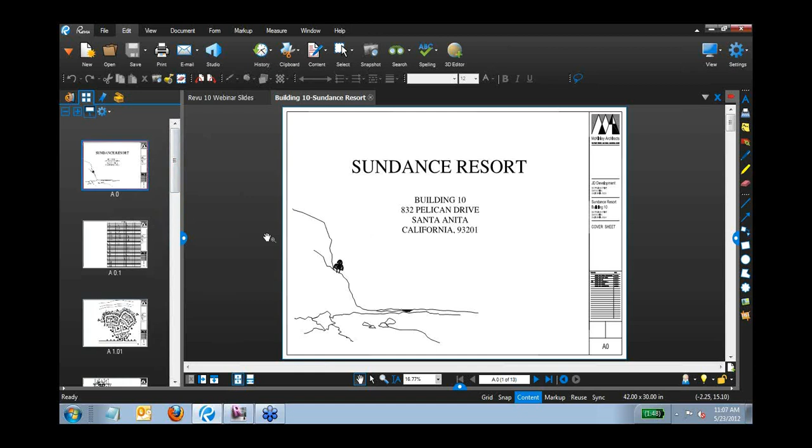In an effort to navigate more efficiently through the interface, I can also leverage the power of hyperlinks in a PDF. If I jump over to my PDF file here, the drawing file, and show you the thumbnails on the left, you'll see this is a multi-page PDF, and I've put a little pre-thought into this setup by creating a smart drawing set.

If I go to my index page for this project and zoom in closer to my sheets, you'll notice that as I hover over some of these sheets, I get my hyperlink cursor. Here's the pan cursor, and here's the hyperlink. If I want to go straight to this page, I just click on it and it jumps straight to that page, making an easy-to-navigate drawing set.

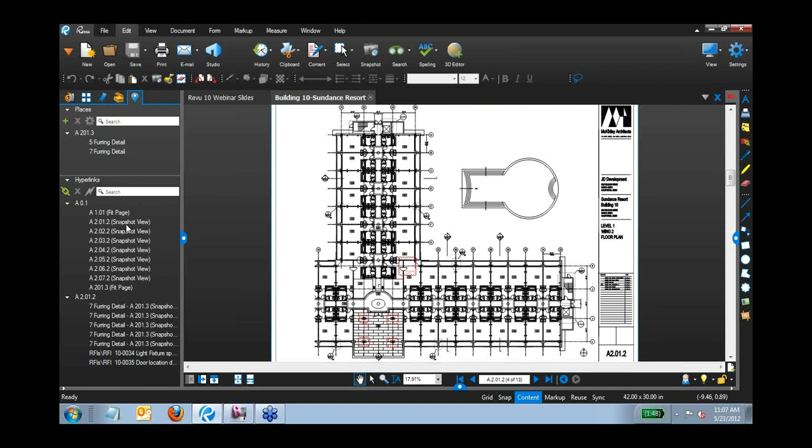If I open up my links panel by going to tab access, links, you'll notice that all my hyperlinks are composed by page, so I can jump to certain hyperlinks easily. You'll also notice that I've hyperlinked my callouts to go to detail references. For this column detail, this callout, if I select it, it jumps me straight to that reference in my details page within this same set.

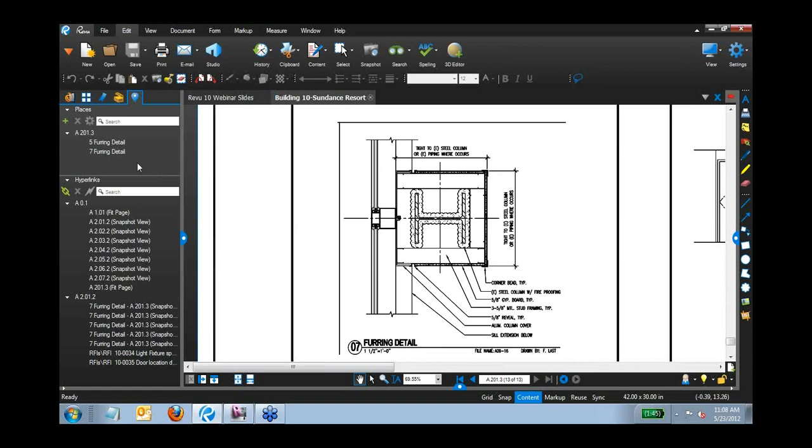Something new with Revu is the ability to reference places. If I go back to page 4, my floor plan, I've shown that this detail link is already hyperlinked to easily navigate the set. But if I've got another detail I want to link, like this one for the elevators which isn't currently hyperlinked, I want to create a new hyperlink for it.

New with version 10 is this feature called places. If I have a hyperlink destination that's going to be used over and over again, I can create a place. To create a new place, I just hit the plus bar, give it a name, and instead of jumping to a page, I want to go to a snapshot view of the elevator detail on my detail page, so I'll say get rectangle.

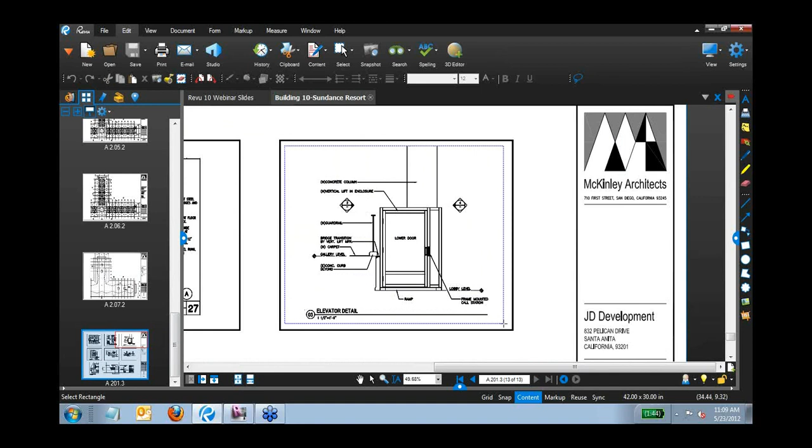I'm going to navigate to that detail page, jumping over to my thumbnails to get there quickly. On my details page, I want to reference this detail over and over with that callout, so this is going to be my place - the elevator detail. I'll select OK.

Back to page 4, the floor plan, I've got this place now saved as the elevator, and I can easily grab my hyperlink tool under markup and just draw a rectangle to create a hyperlink. But there might be more than one callout in this set.

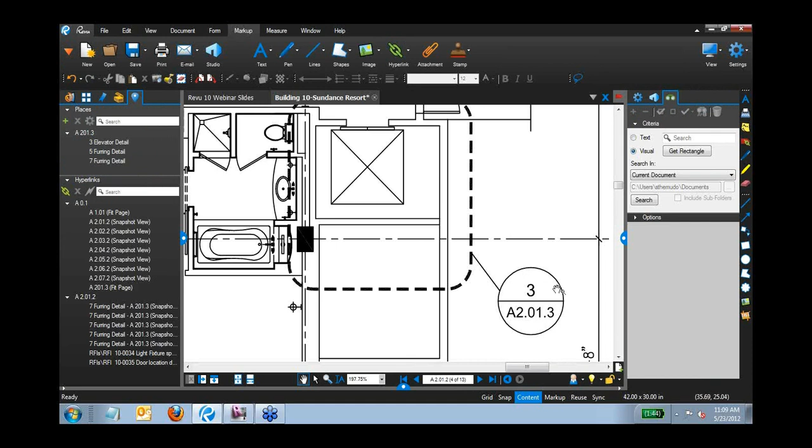So I'm actually going to use my visual search command, again through tab access, search, to find every single occurrence of this callout in this particular sheet. I'll select just this current page and get a rectangle of this detail marker, since I want to find all the instances of this detail on this page. I'll set my sensitivity a couple clicks lower to make sure I find all the instances on this current page, then select search. Now Revu is going to search for that callout anywhere it appears on this page.

Let's try that one more time just to make sure we got it right. I'll go back to my visual search, get the rectangle, draw a rectangle around the number of the callout here, zoom out a little, and try the search again. It looks like I wasn't able to find anything in this document.

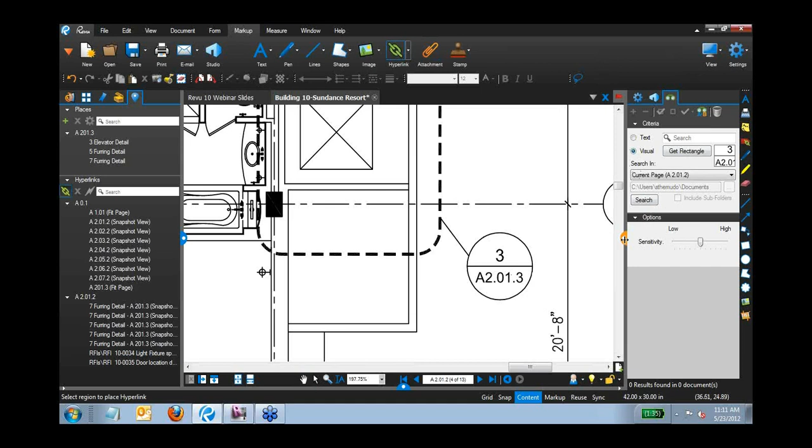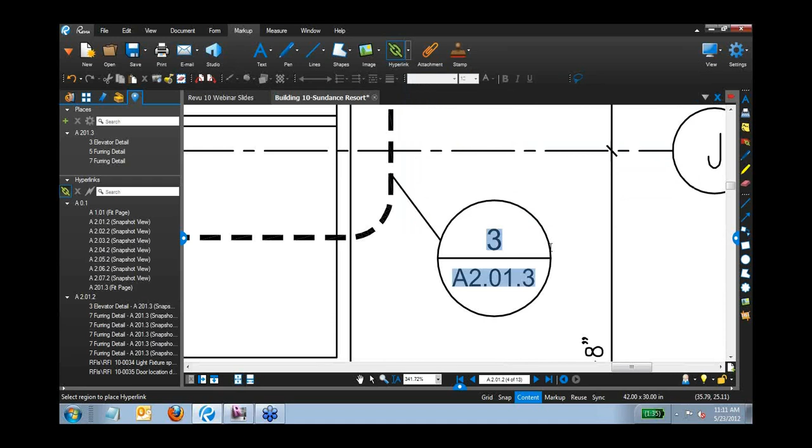So I'm just going to go the good old-fashioned way and hyperlink it manually. Within my hyperlink manager, we've got the ability to draw a rectangle around the area you want to hyperlink to. By selecting that place, I've already got it in my pull-down here to hyperlink to that elevator detail. Selecting OK and making sure I'm using relative paths, I've now generated a hyperlink. You'll see there's a new hyperlink on this page - as I hover over and click on this callout detail, it takes me directly to that detail on the details page.

Let's keep moving. I can hyperlink many of these details over and over as we go through the set, to make this an easily navigable set so that multiple people opening the PDF can easily find which details and which pages they need to reference without flipping through every single page.

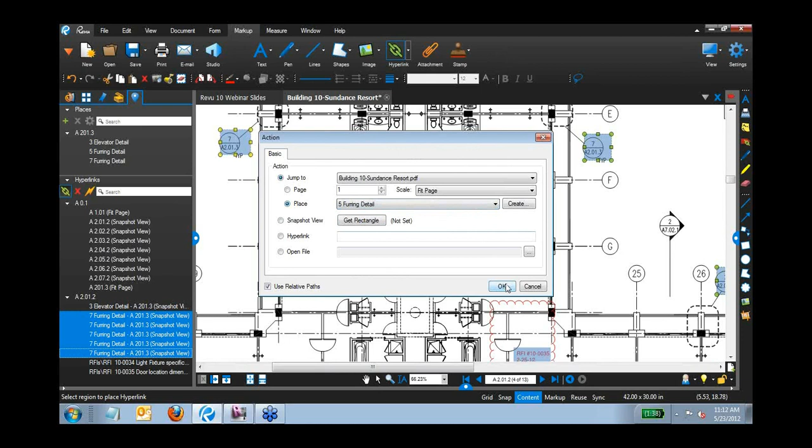Also, with the links in my Hyperlinks Manager, if I need to change out a detail or update it, I can multi-select these links and hit Edit Action. If I need to update these to a new detail reference, let's say the furring detail should refer back to detail number 5, I can quickly select all those, update the place detail, and select OK. Now, as you see in my Hyperlink Manager, all those have been updated to the furring detail on detail number 5 on the sheet.

So that's a quick and easy way to reference and update those sets using the Hyperlink Manager, which is new to Revu 10.

Another thing that's available with Revu 10 is the ability to create projects. Projects makes drawings and files available to team members, consultants, or anyone else who needs access to these files without actually connecting to your network. So what we've done is create this new project feature within the Studio tab.

You'll notice my project can host - I've got my Sundance Resort project right here, let's go ahead and open that. You'll see with the project I can host not only PDFs, but also folders of other file types - Word documents, Excel documents. Think of it as a simple DMS, a document management system, a way to share files online through the Bluebeam Revu interface, not just PDFs but also other file types.

You can add these files to sessions just by right-clicking on the file itself. You can check it out, or add it to sessions, as I was saying. If you're familiar with our Bluebeam sessions, we'll be showing that a little bit later, about how people can collaborate on a PDF for answering questions.

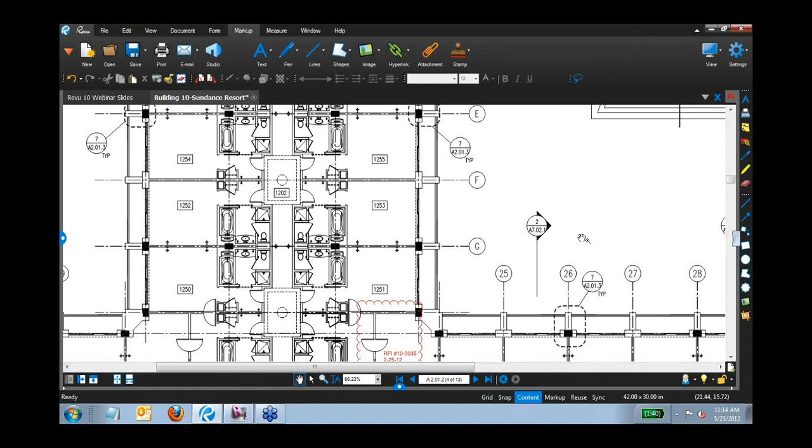One of the workflows we often see is the ability to communicate from the architect back to the contractor, back and forth during the construction process. So using Studio sessions, if I click on my Studio icon, I have a session I've already created called the Project 10 session.

I'm going to open this session, and you'll see the files I have open with the little blue icon are my files in the Studio session under Documents. You also see all my attendees under the attendees list, as well as a full record of all the activity below in the Studio session.

I'm going to close this panel just to get a little more real estate on my screen and open up my tool chest. I've created a tool set specifically to deal with finish carpentry.

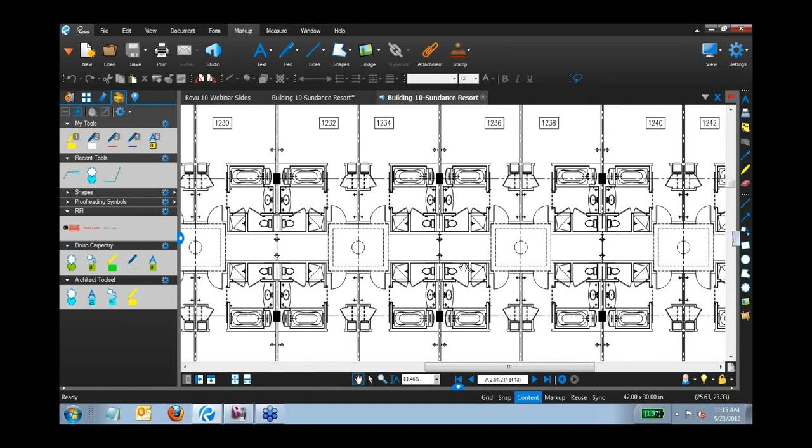Let's say I'm the contractor and I'd like to initiate a session with the architect. To host a session, I'll need a registered copy of Revu, but to attend that session, I can invite people who might not have Revu yet - they can download a free trial of Revu to connect to a Studio session, or they can also download our free PDF viewer called VU.

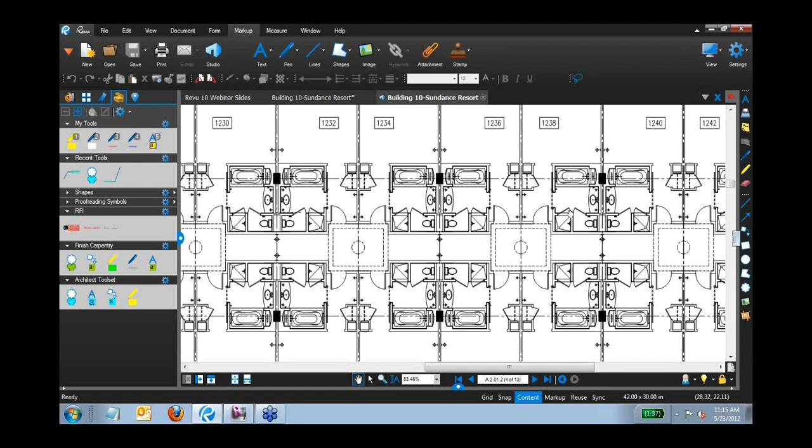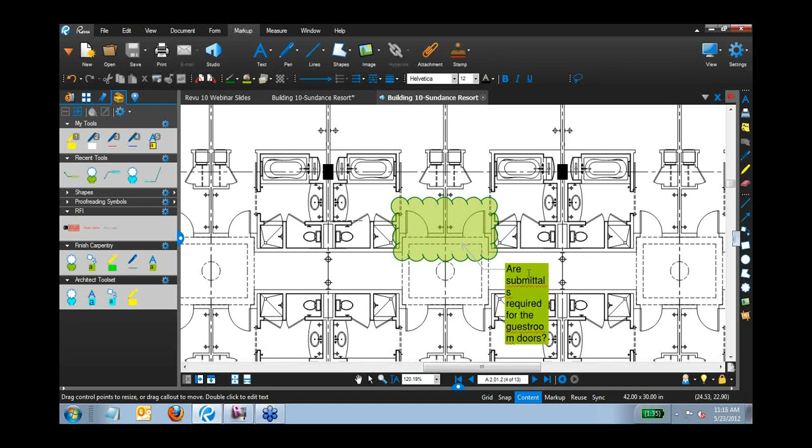That way they can connect to Studio sessions and mark up, as well as view PDFs locally on their PC. So I've got a floor plan here that I'd like to ask the architect a question about. I'm going to make a quick note on the doors of this floor plan, and ask: are submittals required for the guest room doors? You'll notice I have these control points I can move and resize this callout that I created on the actual drawing.

So I'm going to open up my Studio panel again, and you'll see that when attendees are in the session, they light up with this little orange man icon. I can also see in the chat record anything going on in the session. Allison is showing here her answer - yes, she'll upload the specifications. So now she's uploaded a new document, which is the specifications for the doors. Again, there's a new feature in Revu 10 where other attendees can add documents - I want to point that out.

And quickly, I can see as she's making notes in this session, and click right on the activity she's doing. If I click on the chat message here, you'll see it'll jump to the exact location where Allison was looking when she uploaded that document.

And sure enough, it looks like submittals are required for these wood doors, as in the specifications for the wood door. So great, I got a quick response back from the architect, all live within a studio session, and I didn't have to send around emails or make a bunch of phone calls and so on and so forth. I just started a studio session, asked the question, the architect responded, and we got it taken care of very quickly and easily.

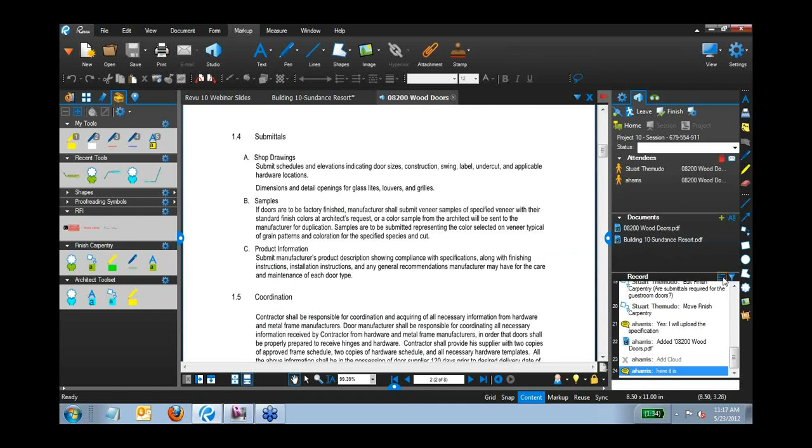Now, if I want to create a record for covering myself in the future, I might want to save a record copy down. As the host, I have the ability to save all these files to a local network drive or a local drive. If I click on the record button here, you'll see I can create a PDF package report with the title, and I can include all the documents, the report, etc., in this PDF package. So what I'm going to do is download this to my desktop as a way of archiving this session so we have it for reference in the future should we need to look at it again.

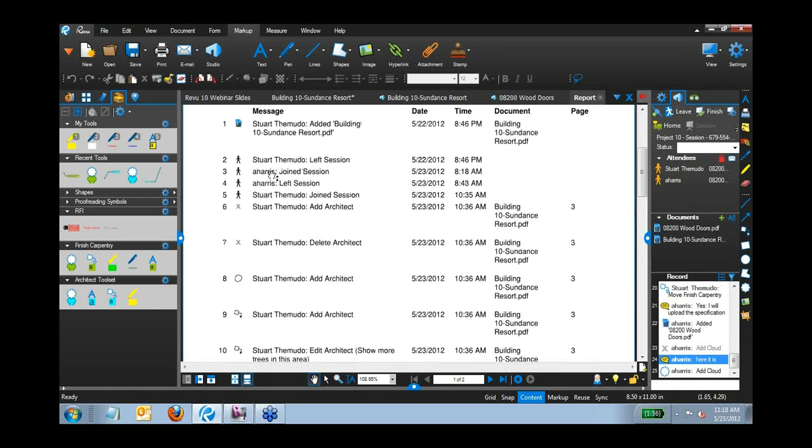And it looks like it's already downloaded very quickly. You'll notice that in the report, if I close this panel a little bit, it will list all the attendees in the session. It will list the documents in that session, as well as all the activity, whether anyone joined or left the session, any comments that were made to a document, as well as new documents that were added.

So if I click on any of these entries, you'll see it's hyperlinked to the actual document. So I can see exactly one-to-one what was stated in the record and what was shown on the plan. Everything's already hyperlinked for me when I download that to my local drive. Super way to archive this for meeting notes, for RFI interactions, for even design collaboration. Document that interaction, so if you need to refer back to it later, it's all hyperlinked and easy to access in the future.

So I'm going to close out or just leave this session. Sessions can remain open as long as you want. You just select leave to exit a specific session. You can go about your work locally. Let's close a few of these files also just to clean up the interface.

So one of the things as construction continues, the contractor might have a question on site about some stairway handrails. We'd like to go through a workflow now of how you would be able to use Revu and PDF to facilitate that RFI process in construction. So to generate an RFI, I'm first going to select New to create a new PDF.

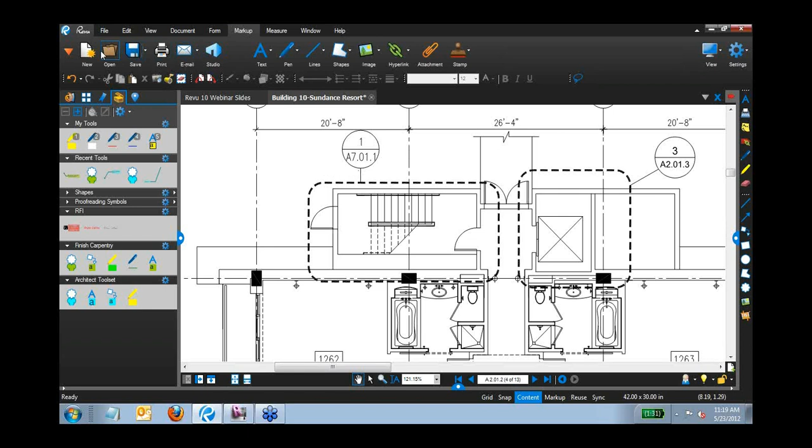I can create a blank PDF, or I can go to one of my templates that I have preloaded. By default, you'll have these templates, and you're free to include or import any template that you might want to use for your company. So I've got a Revu RFI template here. I'm going to add a blank page to the back of it and select OK.

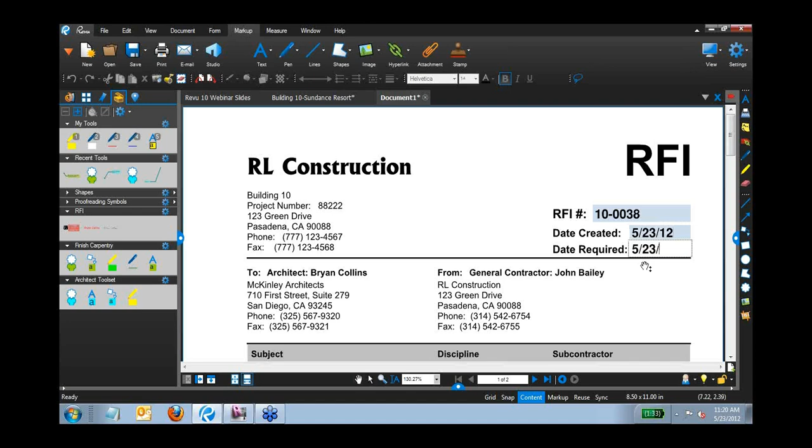So just for formalities, we've got an actual RFI listed here that we want to execute. We want to send it off to the architect. Again, I'm acting as the general contractor, and we will need a response back by tomorrow, please get on it. So the question we have here is: do the handrails extend at the landings?

Now, we all know that this could be generic to any handrails, to any landing. So from the construction standpoint, from the contractor standpoint, I want to include a sketch or a piece of this floor plan in this RFI. So I'm going to grab my snapshot tool under Edit, Snapshot, and I can just drag an area here of this stairway that I want to include. You'll see the screen will flash blue quickly, signifying that it has created a copy.

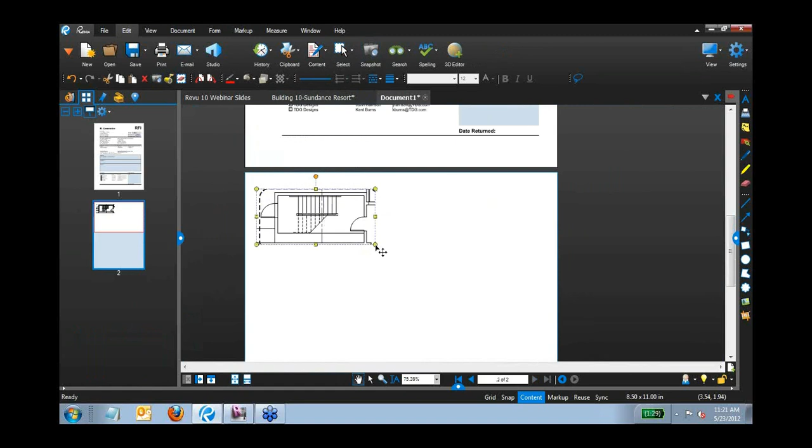I'm just going to right-click and paste into my new document here. As I paste that into the document, you'll notice it's a one-to-one copy of the original document. I'm just going to scale it up because there's no need to retain that one-to-one scale for this particular sketch. I'm also going to right-click and flatten so that I don't accidentally move that pasted snapshot that I created.

So now, from the construction standpoint, I would either hit my email button, which would call up my Outlook message and automatically attach this PDF to send it off to the architect, or I can save it in my appropriate folder here to refer to it later.

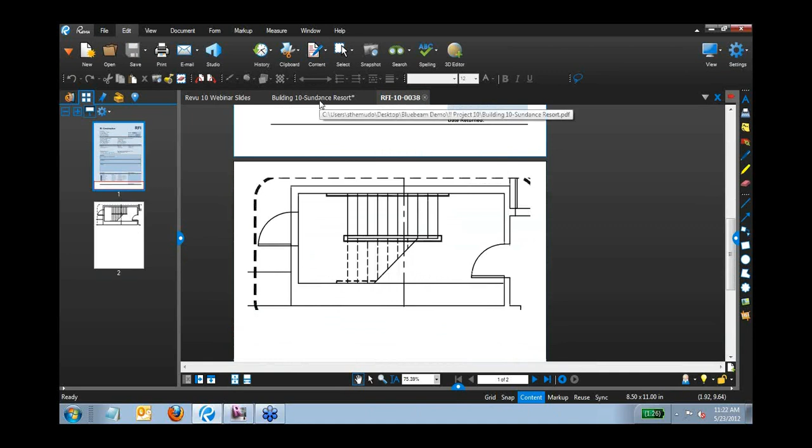So now we've sent this off to the architect, and the architect receives it and says, well, where are the handrails? At what landing? It looks like I've got an image here of what particular landing the contractor is asking about. To get a little more detail, I'm going to say, yep, the handrails extend 12 inches past landing.

Another thing I'd like to include is some 3D information to show how that handrail might extend. I could show this with clouds or my dimension tools in the markups, or I could insert a 3D PDF. So what I'm going to do is insert a 3D PDF.

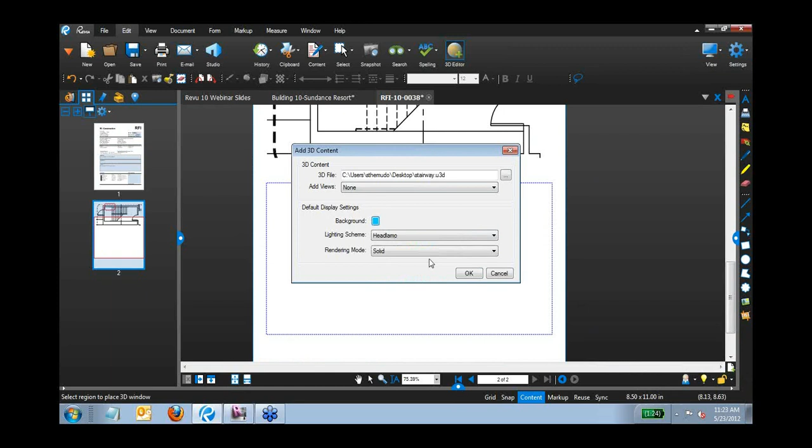By hitting Edit, 3D Editor, it's going to ask me to place an area to include the 3D PDF. I've exported a U3D file from Revit, and I'm going to insert that here. I've got a couple options to change the background color as well as some lighting and rendering. I'll just keep that as default and hit OK. So now you see I've got an actual 3D model in a PDF.

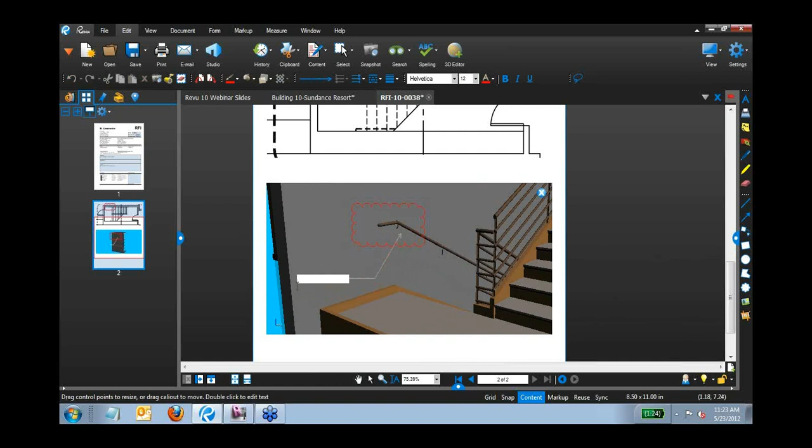There's nothing special about this, it's a .pdf file extension. But I'm able to navigate, orbit, pan, and zoom in this 3D model. I'm also able to zoom into areas of this PDF and mark up in 3D. So as I highlight this area of the landing and grab my call-out tool, I can say, yes, handrails to extend 12 inches.

Just like any markup in Revu, I can very easily modify its properties using the fill commands, any of the opacity commands here, just to draw a little more attention to these markups should I need to.

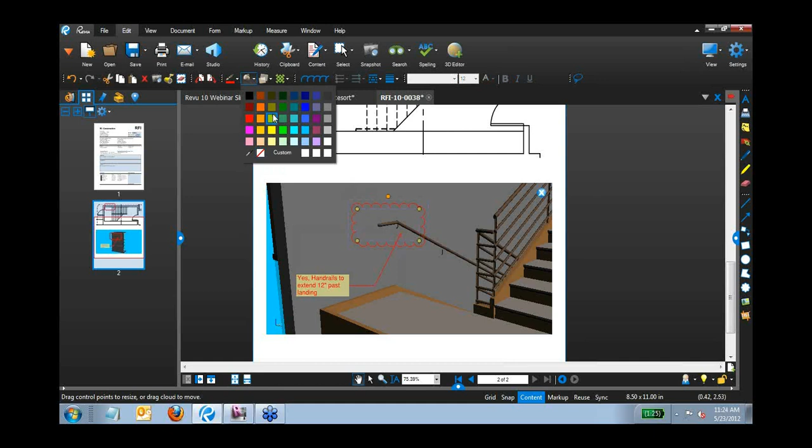You'll also notice in the left panel here, if I open my 3D model tree, these views are named. Currently this is just a markup view, but if I want to add more information, I can call this the RFI number so the contractor knows exactly what it's referring to.

So again, I can zoom out and navigate through this model. This blue markup indicator, this little sphere here, tells me there is a 3D markup in this file. I click on it, and it takes me directly to that view. If I just hover over the markup indicator, it gives me that view name.

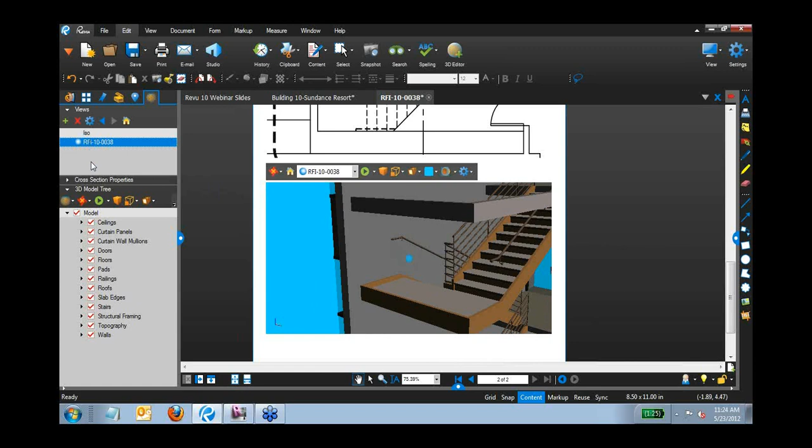As well, if I want to browse through multiple views in the left 3D model tree, I can click on that and it'll take me directly to the marked up view in 3D. So I'm getting a little carried away here, I'm just trying to respond to this RFI. Let's finish up that workflow before too long.

So I've responded in the text fields here what the RFI response is. I also want to make sure I sign this, so I'm going to grab my RFI tool set that I created and add my Brian Collins signature. That's who I'm acting as right now. Also put in a text field here for the stamp.

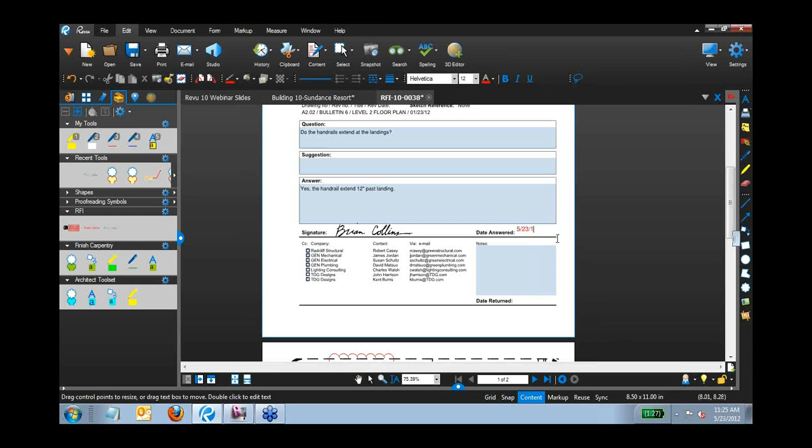We're going to say we actually answered this ahead of schedule, just like that, as well as add a stamp to this sketch here at the bottom just so we know it was created in-house here. So I've got a stamp that I've pre-assembled using the PDF stamps available in Revu as well, right here.

And it's got some auto field that fills in for me. You'll see the date field will automatically populate, as well as the person that uses that stamp. So again, quick ways to answer these RFIs, include some 3D information, as well as quickly respond to them by hitting email. If I'm recording these in my folder, I would want to save it as an answered RFI.

And that's the RFI. Now, I mentioned that this U3D file was created directly out of Revit. I will be happy to show you that plugin at the end here, just to show you how we integrate with Revit and Revit files to be able to export into 3D PDF as well.

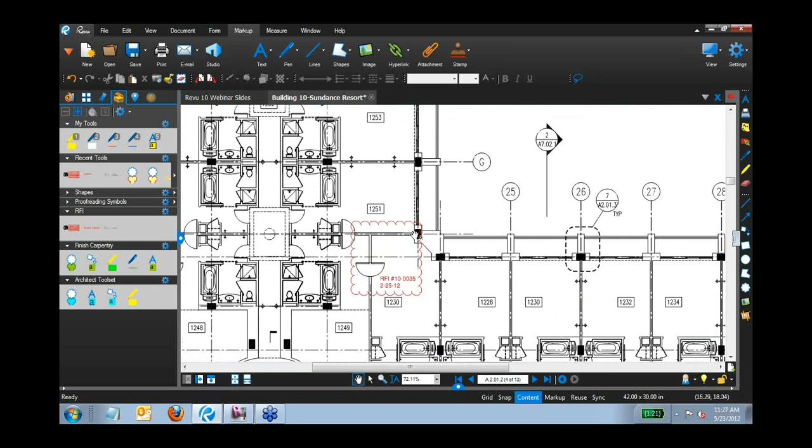So I wanted to keep moving along here. In addition to RFIs, we do have some great workflows for document comparison as well as slip sheeting. As RFIs are sent back and forth during the project, one thing I want to add to conclude that RFI process is that I'm keeping track of my RFIs here. So that last one that the contractor made, I actually want to record that by clouding it and putting a text box here.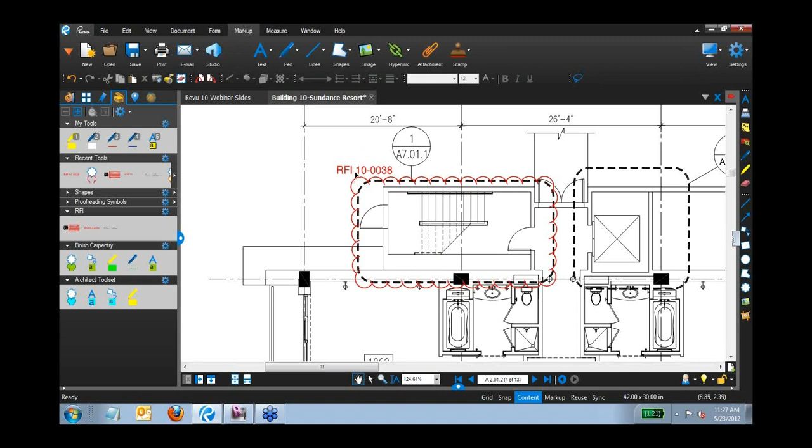I want to do this so that if there are any questions, I can make this a smart hyperlink, like I've been doing with the entire set, to reference that RFI. By hyperlinking and drawing a box around that number, I can hyperlink to a file as well as places on the PDF. So I'm going to open this file, the answered RFI that I've saved in my directory, and select OK.

Now you'll see I've got this assembled RFI note, and if I want to see what that RFI was, I just select the RFI button. It'll open up that RFI as well as the responses that went along with it. You'll notice other places on this drawing have done the same, and they're all linked back to those RFIs, so if I need to reference them, I don't have to go hunting through the folder. I just click the hyperlink and it opens them automatically.

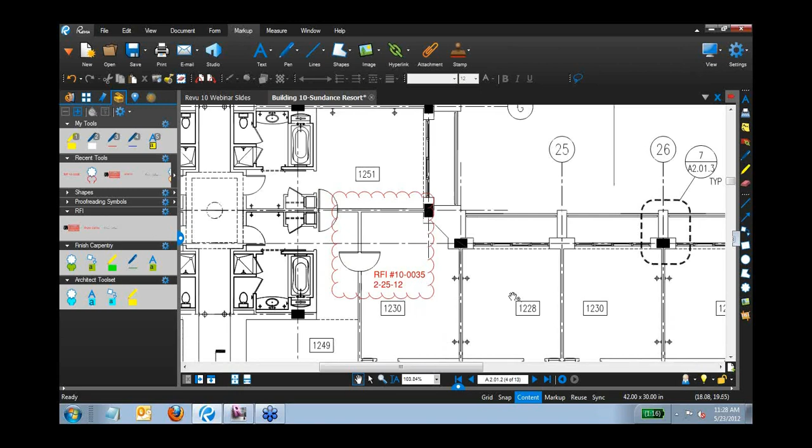As the project is moving along and drawings are revised, I'm not only keeping track of the RFIs by hyperlinking and using simple markup tools on the PDF, but I can also look at comparing documents. One of the things we've optimized now with Revu 10 is the ability to add a bit more functionality to our overlay pages.

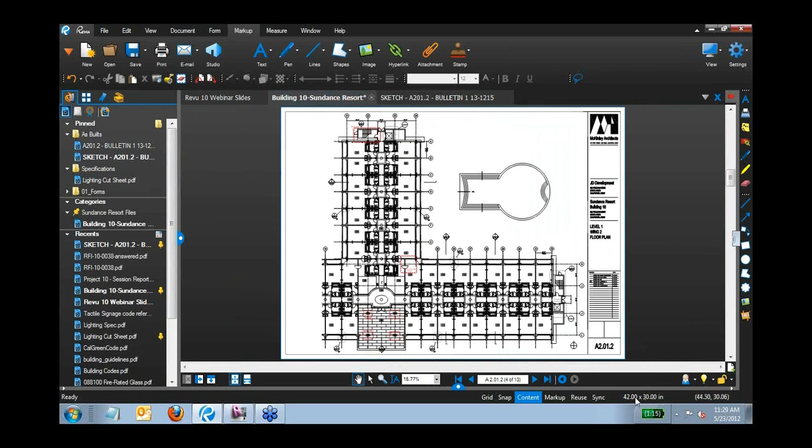I'm going to modify this interface just a little bit here, and go to my file access to get to some files I want to demo with. You notice here I've got my full 42 by 30 PDF set, and in this file I've actually got an 11 by 17 — a sketch that was issued by the architect somewhere around grid lines 30, 31, and 32.

There's been a change to these guest rooms, so before I slip sheet this file completely out, I'd like to do a quick overlay pages to see exactly what's changed. Under Document, Comparison, and Overlay Pages, I can quickly call up these existing files. Since they're already open, Revu asks if these are the files I want to open. I don't need these webinar slides, but I'd like to open this sketch. I can modify the colors of the line work so I can quickly see which lines are with which file.

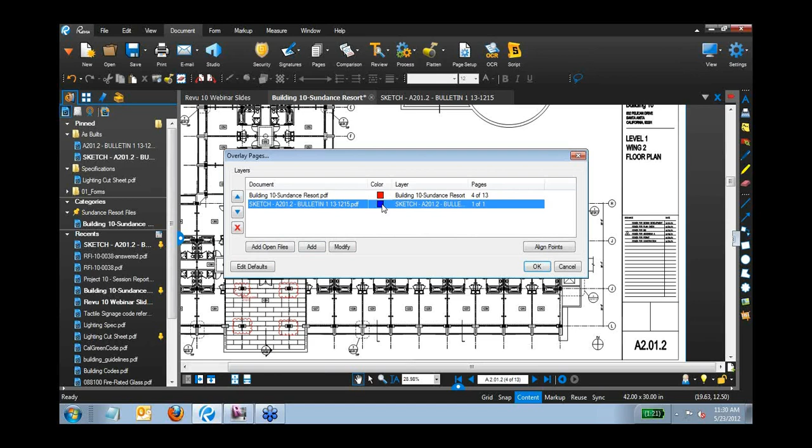Remember, the full drawing size is 30 by 42, and the sketch was 11 by 17. Previously there was a roundabout way to do this, but with Revu 10 we now have the ability to align points. So I'm going to select Align Points, and it's going to ask me to choose 3 points, not 4 — again, we're saving clicks, since efficiency is important to all our users. So only 3 points on the document to manually align these two sets.

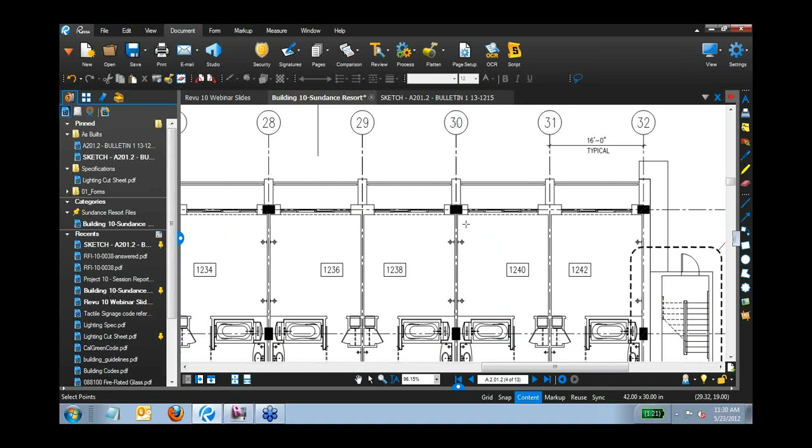I'm going to zoom in to this, again column 30, 31, and 32 — somewhere in here there's a change. You notice I have my content snap turned on, which is great because it snaps to underlying content in this PDF. So I'm just going to select the interior wall intersections for these locations, and this third spot here as well.

Revu is going to automatically jump me to the next file I've selected in my overlay pages. It's going to snap to this drawing too, since it was created from AutoCAD and retains the vector information. I have to choose them in the same order here: 1, 2, and 3.

Now it's bringing me back to my overlay pages dialog where I can modify the colors. I've changed my mind — instead of blue, I actually want to see these in green. So I'm going to change that color to a nice bright green so it stands out.

Once I select OK, Revu is going to overlay these pages, kind of like a light table, if you're familiar with a light table back in the day. It's going to overlay these two drawings and colorize them to the colors I've assigned. Anywhere there's an exact overlap, it's going to color them black, and anywhere there's a difference, it'll shine through those colorized files.

You'll see that Revu is also asking me about layers. What Revu did was create a layered PDF with those two different files, and it's asking if I'd like to open the Layers tab. I said, sure, thanks, Revu.

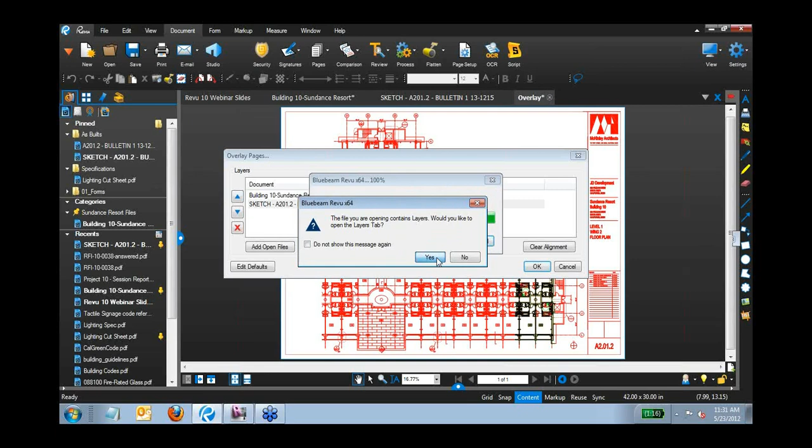As I zoom in, you'll see that this area of the document has a lot of dark line work. That's where the lines overlap exactly and have turned to a shade of dark brown or black. Where they're not identical, I can actually see the differences.

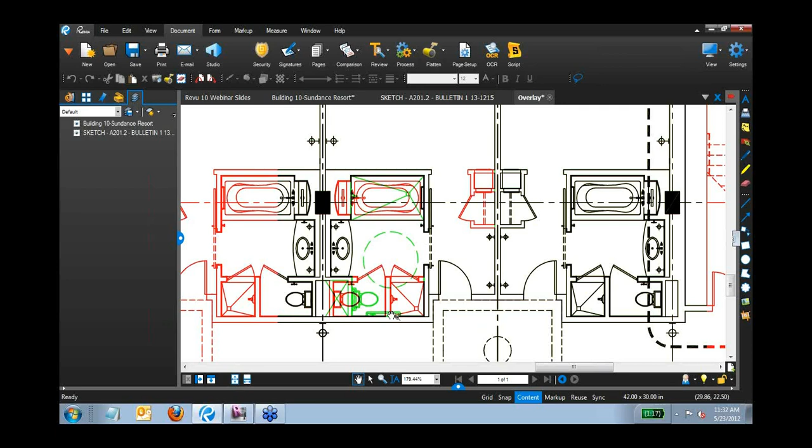Here, in my original document which I selected in red, I had this closet and it looked like I had a full restroom. This sketch I remember seeing was something to do with some ADA modifications. So what's happened now is the architect has actually removed this closet to allow for a little bit more clearance for wheelchair access, as well as a roll-in shower, the 5-foot radius here for turnaround, as well as the appropriate plumbing fixtures and grab bars in that toilet room. Looks like it's not just room 1240, but it's also room 1242.

So as a contractor now, I can see what this change is and what capacity is before I slip sheet it into my set. If I'd like to slip sheet this set, I can close my overlay pages. Now that I've seen quickly what that change was...

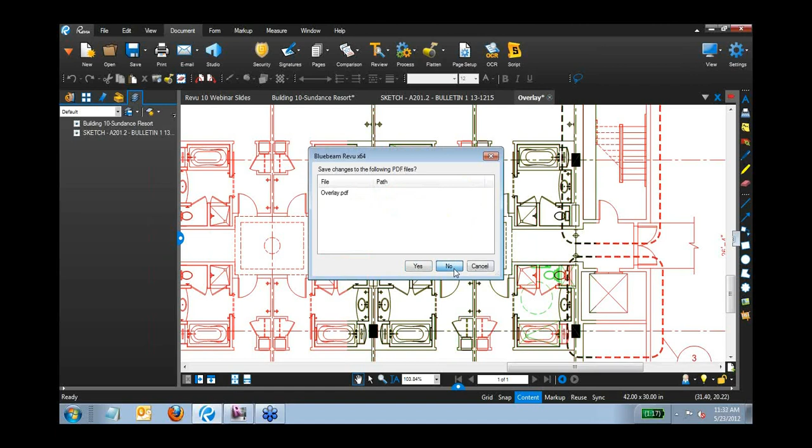This is my sketch. Let's go over to the full set. Let's go back into the thumbnails view. You'll notice on this sheet, in my thumbnails, I can right-click and replace pages to digitally slip sheet out that new revision, which will also keep all my hyperlinks and markups.

Alternatively, I can also create a layered PDF to create a new layer. So let's create a new layer in this file to make sure that we retain that old drawing as well as the new layer with this new bulletin.

So to create a new layer, I'm going to add a new layer right here. I want to add the file, which is going to be that new bulletin that was issued, not the sketch, but the actual full sheet that was issued. I can also modify the colors, or I can keep them the same color as they are. Make sure that line work is black as it's included, and select OK.

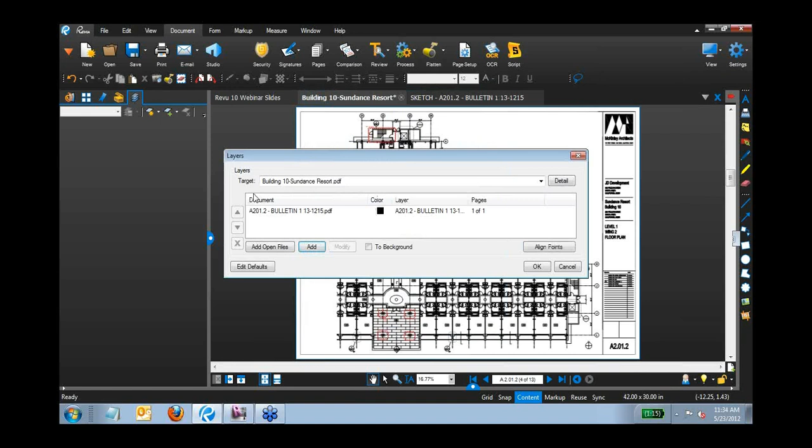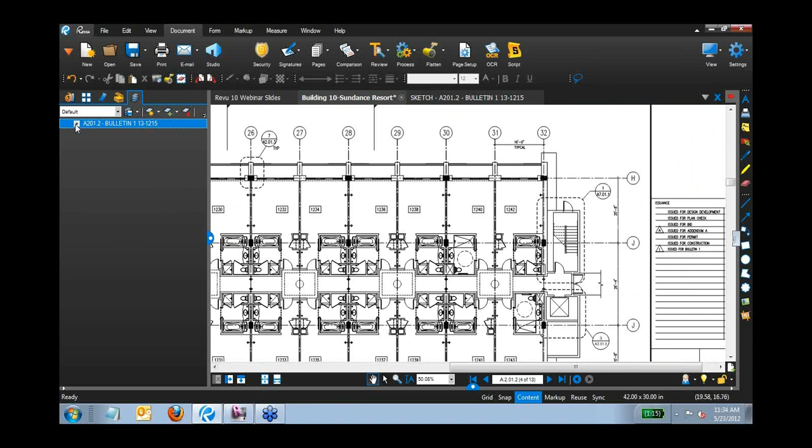Again, I'm going to be adding a new layer to this PDF so that I can see any revisions that come through on this sheet, and I can refer back to them. So as we note here, I have this layer now with the bulletin turned on. As I turn off this layer, you'll see I still have the old version of the drawing. If we look at the bathroom here, you'll see how that changed. So it's a great way to keep a record of any changes of the drawing within the set, but also keep your original files there handy in case you need to refer back to them.

So moving right along here, I'll close a few of these files. I want to talk a little bit about punch and back check. As the project moves along, I'm going to close this file and open up a fresh one. I've got a punch file here. As the project moves closer to completion, Revu's punch tools and markup list tracking help to eliminate any redundancy, as well as increase accountability and productivity.

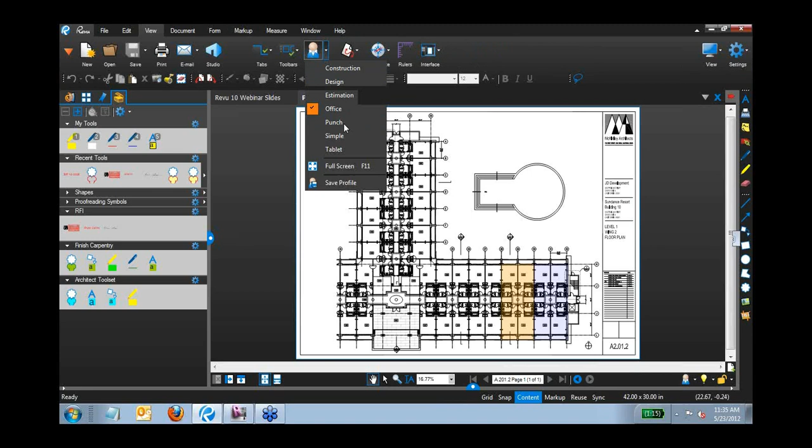So with Revu 10, something new called Spaces has been introduced. This can be used to identify a zone or a room or any sort of space that you want to keep track of during the punch process. I've also got the ability to change profiles again. On our website, there's a punch profile you can download for free, which has optimized the interface as well as some tool sets to help get you going for the punch process.

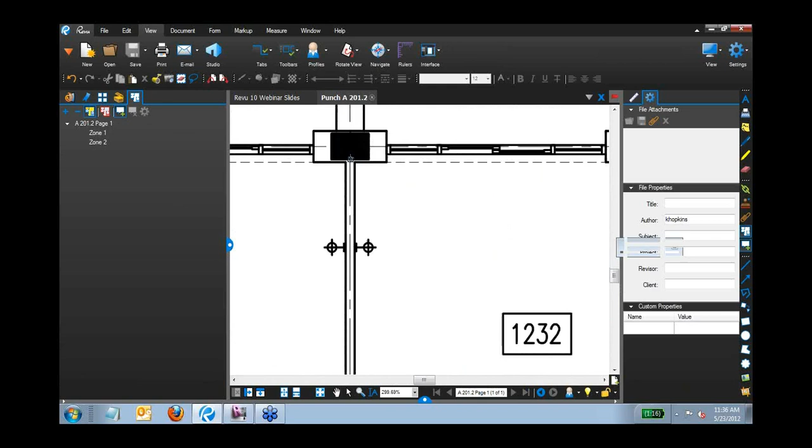So as I open my punch profile in this drawing, you'll see I've got a couple of spaces already created in this document. You also notice that my tool chest is opened up here on the left. Now, if I click on the Spaces tab up above, you see I've got two zones already created. I want to add a new zone here to help with my tracking in these rooms as I'm going through doing the punch list. So I'm going to zoom in and do a zone for this area of the project.

All right, so I've selected an area. We're going to call this Zone 3. Once I do that, it'll populate not only in my spaces, but it'll also give me options for modifying it. I'm actually going to change this color to green just so it stands out a little bit.

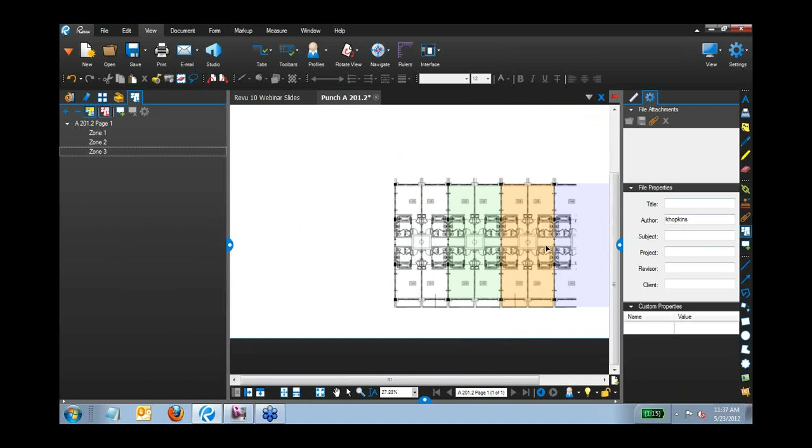So I've got a blue zone, an orange zone, and a green zone, very easily shown on the plan right here. Now, to do the punch process, I'd like to actually create little sheets instead of having all my punch items show up on this large sheet.

So I'm going to create a new document again by hitting New. I can use a blank page, or I can use my punch template. I've got a punch template already created. I'll select OK. Now within the document I've got this template that provides a nice title block and border for me to use.

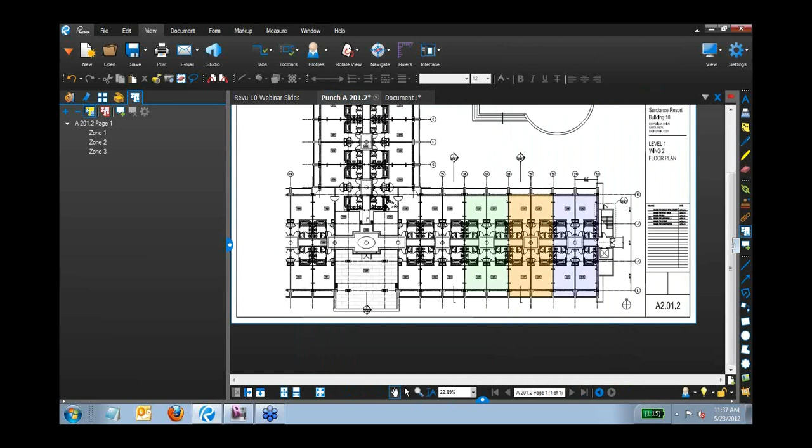Nothing fancy, just something to keep organized when doing punch on the project using a tablet PC or otherwise. So again, I'm going to go to my punch, the full floor plan. I'll grab that snapshot tool, which I use all the time to create copies of my drawings. I'll just select the area of Zone 3 that I've selected.

And again, just right-click and paste that onto my template. This is going to bring everything over into the file here, and I can flatten it for easy use.

Let's do that one more time. Looks like I didn't grab the zone when I pulled it over, so let's just hit undo and go back to my zone, and let's do a quick snapshot of the zone itself.

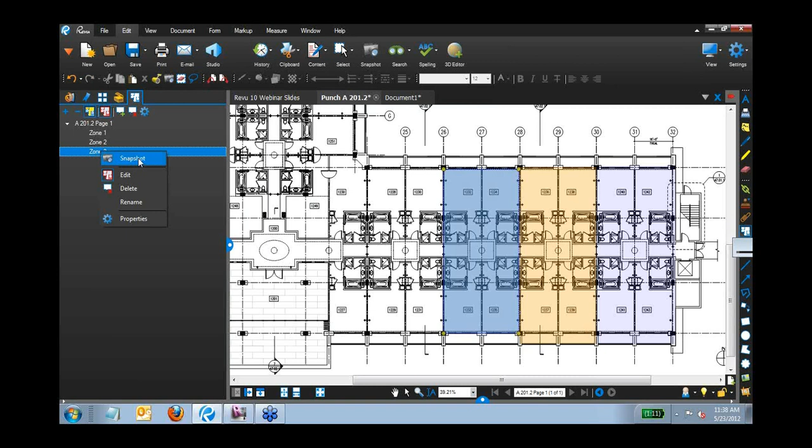Again, right-click is your best friend in Revu. So click directly onto my spaces here, and I can create a snapshot of that zone. Super easy—right-click and paste. Now I get the actual zone information as well as the underlying vector content from that PDF.

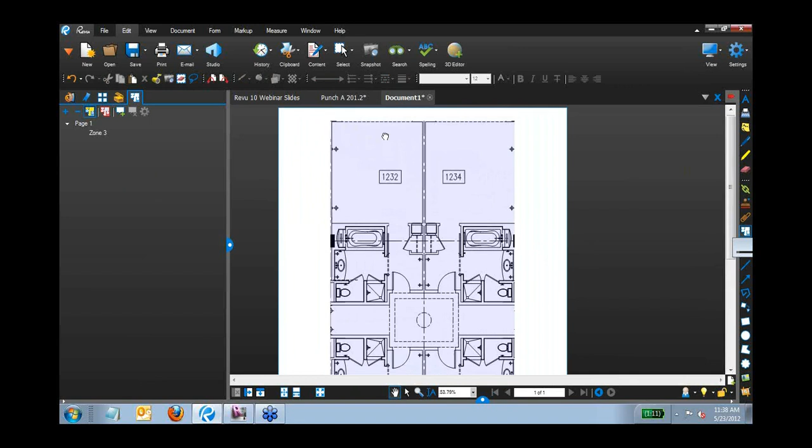And I can resize this. Scale is not very important to me, but I am going to flatten it so it doesn't get moved around on the page. Another thing I want to add with these spaces is the ability to create individual rooms, so I can add another level of information onto the spaces to show my specific rooms.

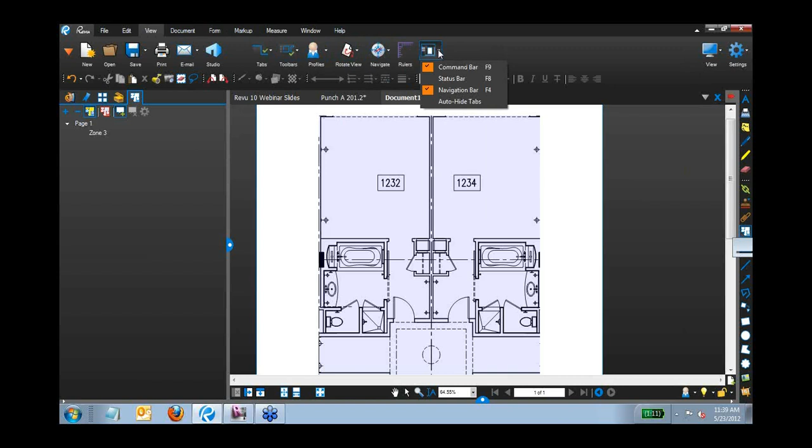So I'm just going to add a space. Again, I can keep my content turned on, or I can turn it off. I'd like to see my status bar on, so I'm going to turn this content off and draw a new space for this room.

This room is 1232, so I'm going to type that in once, select OK, and now I've got a new space created right on top. I'd love to go through all four of these, so I'm just going to go 1, 2, 3, and click a new room here.

You'll notice that Revu is automatically increasing by 1 each one of these spaces, so I don't have to keep retyping it. As long as I do the rooms in order, I can quickly populate these, and it'll remember what number I was on before—quickly and efficiently preparing this drawing for when I go out in the field. And 1235—awesome. So now I've created this zone that I'm ready to punch and start using some of the punch keys.

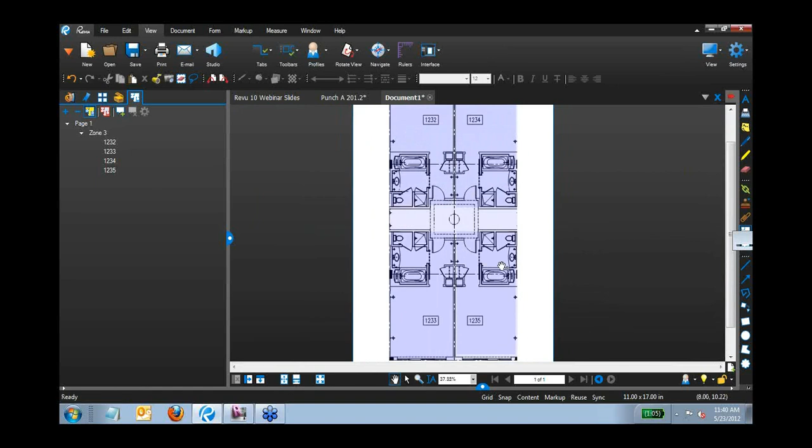So let's go to the tool chest again, and you can see that in my carpentry punch, I've got items here that I can just drop into the room as I see fit. So if there are issues here that the wall finish needs to be repaired, we can drop those in, and if there's any grout issues, I can drop those directly onto the PDF.

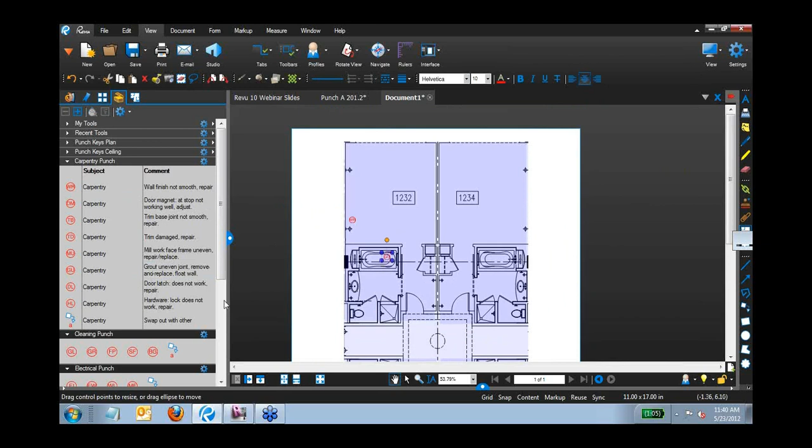I'll zoom in here so you can see what this looks like a little bit more. These punch keys carry information with them, so it's very easy for me to drop them on the drawing to see graphically, but they'll also show up in my markups list, which I'll show shortly.

I can modify these punch keys on the fly. So if I need to create a new punch key, I'll double-click this, and let's say I'm going to call this Repair and Paint. Using the properties of this punch, I'm going to keep it with Carpentry, but I want it to say Repair Wall and Paint.

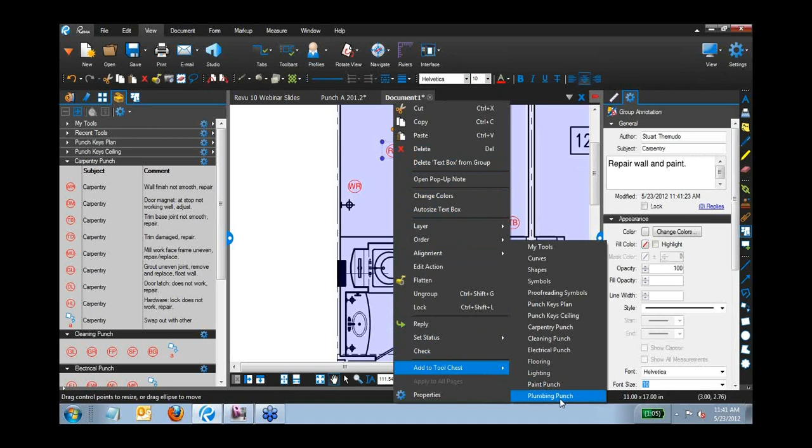So very quickly, I just created a new punch key on my drawing, which I can then right-click, add to my tool chest, and put it right back into my carpentry punch list right there.

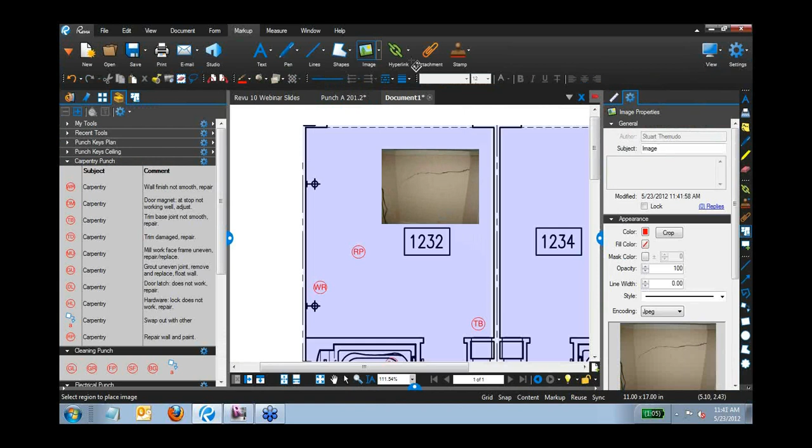You'll see it's RP. Another thing I'd like to do in the field is take a bunch of photographs to document everything. So to add a photograph in Revu now, I just go to Markup, Image, and select a photograph I'm either taking in the field with my tablet PC or something saved locally on my desktop. If there's a wall issue like this one, I can easily drop that in and use the arrow tool to show exactly where that problem occurs. That way I've got it recorded with my punch keys, but also an actual image showing exactly what the damage is to that wall.

So as I've been placing these different markup tools, going through the different rooms, Revu is actually keeping track of all these for me in the markups list. If I zoom out all the way, you'll see the markups I've made on this punch. And if I open the markups list, we can see exactly how Revu is tracking all of these markups on the PDF. You'll also notice it's pulling in some more information that I didn't have before.

New with Spaces in Revu 10 is this ability to not only create zones, but also rooms, and that information is transferred into the markup without having to manually program it in. We found through suggestions and workflows from our customers that this was something ideal, so our awesome engineering team was able to include this in Revu 10.

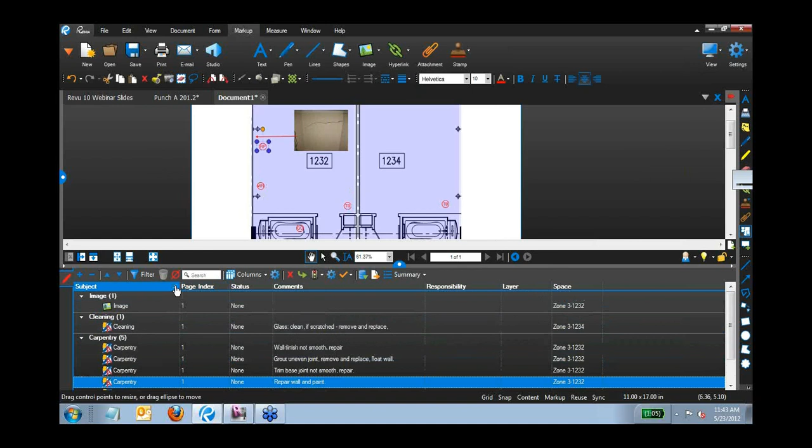So I can go through each one of these markups, and as I click through, you see it'll jump exactly to that location. You see I can also sort by the subject. So as I've created tool sets that have the subject of carpentry, I can actually filter out specifically for carpentry or cleaning. Using sort and filter through my markups list, I can easily create a summary list to then send to the appropriate contractor.

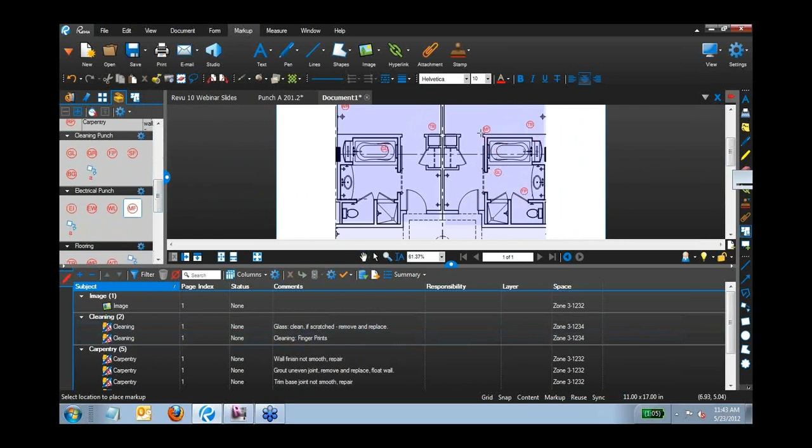Let's add a few more markups here so you can see how that looks. If I have some cleaning that I'd like taken care of, and also some electrical items, I can now sort and filter by the discipline. I can filter just to show my cleaning items, and you'll see all the markups are still on my page, but only the cleaning items are in the bright color—everything else has been grayed out. Now I can assign responsibility to each one of these markups just by double-clicking and assigning responsibility to who needs to pick those up.

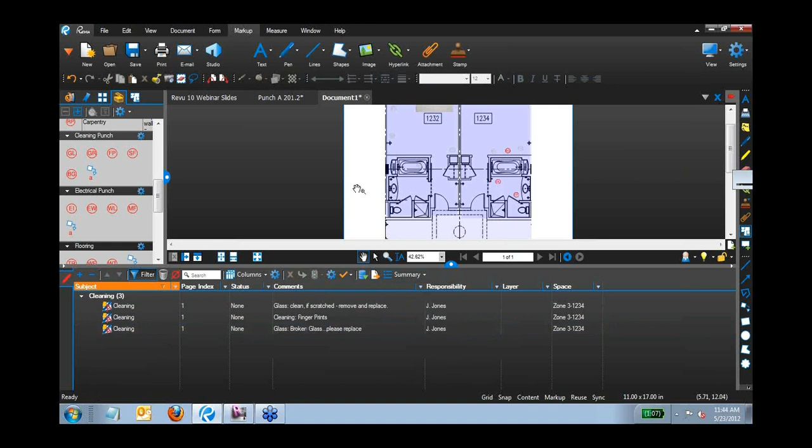And very easily select the summary, and I can export this to Excel or create a PDF summary. So what I'm going to do is create a PDF summary—I'm actually going to append it to this page. So I'll go Summary, PDF Summary, and since I've filtered out, it's just going to show me the items I filtered. I'm going to append this to the current PDF. This is going to be the cleaning punch list, dated today, and I'll select OK. So Revu is now going to take all those markups, only the ones I filtered, and add them to a nice tabulated list that I can email directly to my sub to make those comments.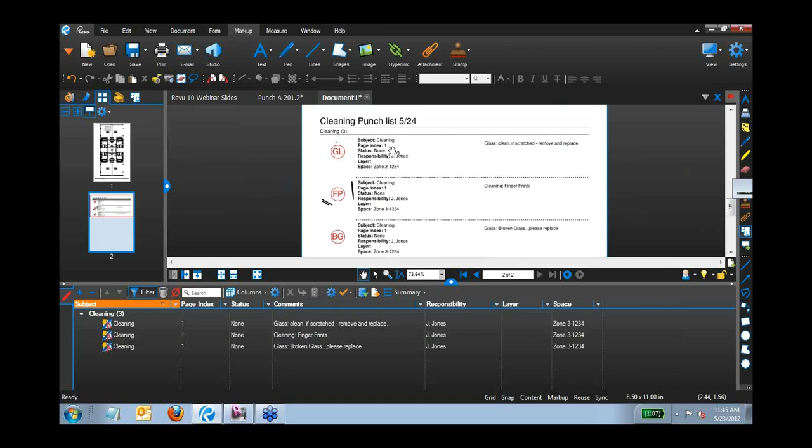This could easily be used for consultants as well. If you have particular consultants you want to filter and sort by each discipline, you can send them a task list that only shows what their responsibilities are. Another great thing with this task list is it's hyperlinked—so as I click on the thumbnail, you'll see it'll hyperlink me directly to the original document so I can see it in context of the rest of the drawing. I use my back browser button to get back to the list, and so on. I can go through each one of these items in my task list and make sure I take care of them accurately.

So I've sent this out, and now I need to go back and do a back check. Let's call this my punch document, and I'm going to save this to my desktop.

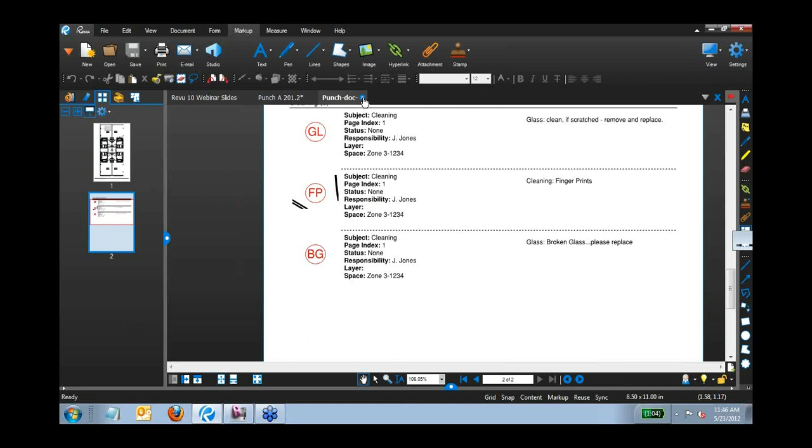Now as I go back into the field, I need to refer back to that original punch document, and I'm going to turn my filter off so I can begin to back check and make sure any of the items I noted were corrected. For this, I don't need the specific subs information, so I can delete that page by right-clicking in the thumbnails.

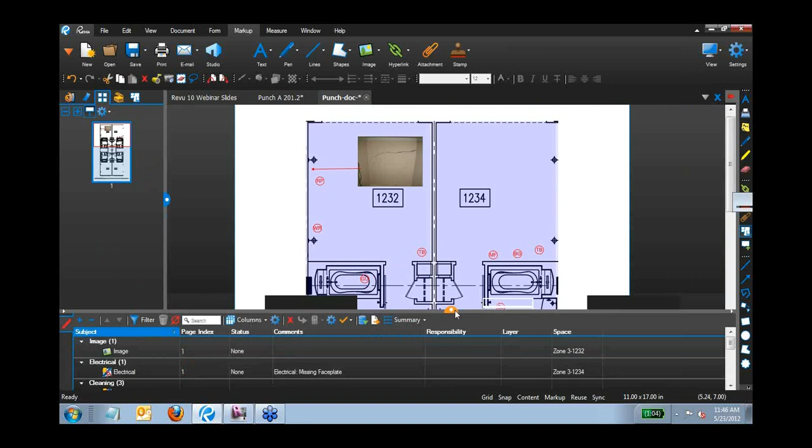As I go through each one of these punch items, there's a column here called Status. Status allows me to sort again by discipline and expand this column. Status allows me to right-click and set a status. Each one of these statuses will record the date and time at which the status was changed, as well as whether it's accepted, rejected, canceled, or completed.

Just a little tip with the statuses: if I go into Manage Status, I've got a few options here. Once I select an item that's been accepted, I actually wanted it to show me on the drawing by changing to a color. I wanted to change it to green. I can change it to any color I want right within the interface.

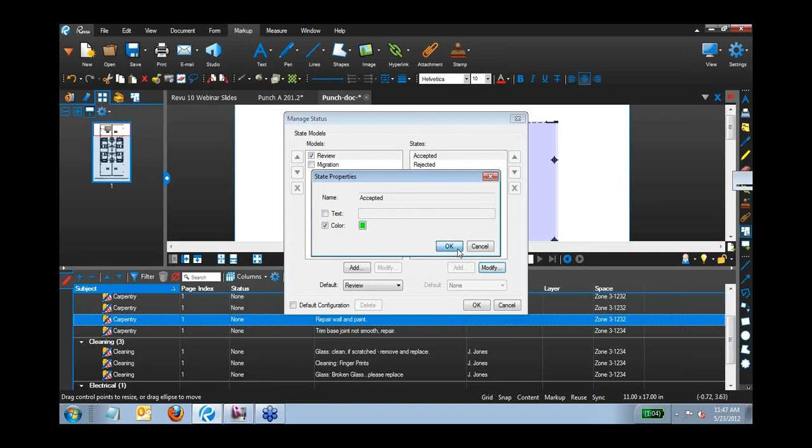So as I'm selecting these, I double-click or right-click and change the status to accepted. You'll see it's recorded my name, the time and the date, as well as the status. You'll also notice on the drawing it's changed to green. So very easily, at a glance, I can see which items are accepted and which ones haven't been or are still rejected. I can go through and change any of these markups as I'm walking through the rooms to make sure these items were picked up in the back check. Again, sort and filter to make sure I stay on top of that.

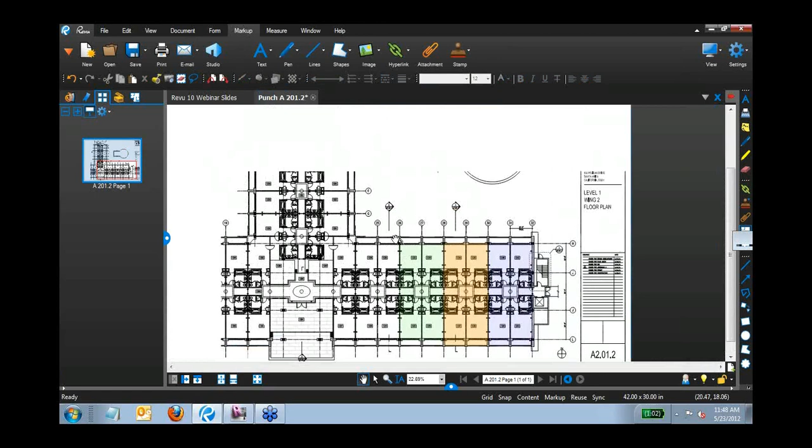So with the project approaching closeout and all the back check items corrected, we can now hyperlink any of these manuals, filter changes, or equipment schedules. We can hyperlink that to the original as-built set so that the owner has a nice PDF that he can sort through and use as a maintenance manual moving forward. It can all be done in PDF and really helps to consistently keep that as the project moves along.

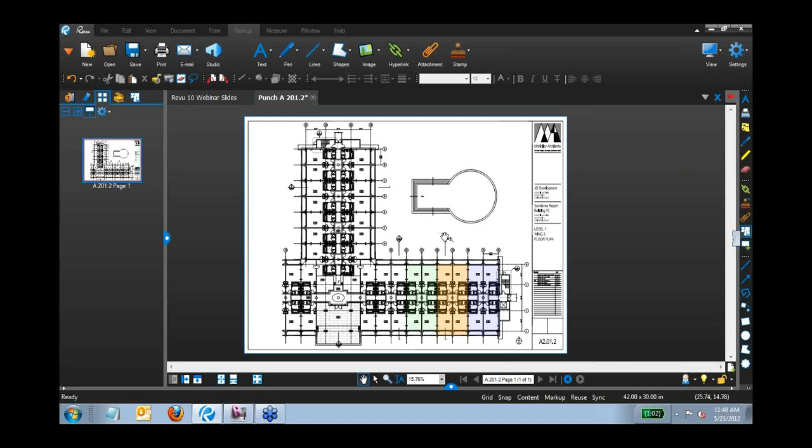We'll get to one right here, right away from Danny. He was asking, can files be hosted on ProjectWise? Absolutely. We have a direct integration for SharePoint and ProjectWise. So what that means is in your settings, you can actually program your credentials for ProjectWise and SharePoint, and each time you need to open a file, it'll do the check-in and check-out process for you directly through the interface. Good question, that's great.

So I have a question. I wanted to know if you guys offered any technical support through your website maybe, or additional resources that can help people if they run into any issues while using Revu 10.

Absolutely. So we understand that on a day-to-day basis you might have questions and run into an issue, and we want to make sure we address those as quickly as possible. Under your Help tab here in the command bar, we've got a few options. We've got some resources for tutorials as well as a nice help guide where you can type in a question and see search items in our help. But also we've got the ability to contact our tech support right within the ribbon. So this little lifesaver here, if you click the down button, you've got technical support.

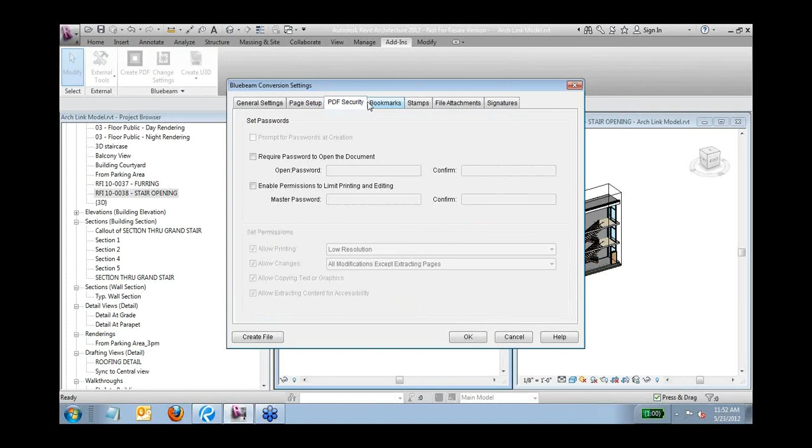So under add-ins, you'll see I have my Create PDF button. I also have my Change Settings if I'd like to modify the way these PDFs are created, both by multiple sheets in one set, the page setup. If I want to add any password security, control the bookmark organization, as well as adding stamps, file attachments, even digital signature fields, all at the point of creation from the plugin.

You'll also notice I can select multiple sheets similar to the Revit interface. I've now got the ability to batch create PDFs from my Revit sheets and views. To many of you this will look familiar, but with a couple improvements. Instead of just filtering sheets and views, our developer noted we have a lot of customers that just want to quickly filter to elevations or different types of views, so we give you the option to filter for specific views, not just the generic sheets and views Revit offers by default.

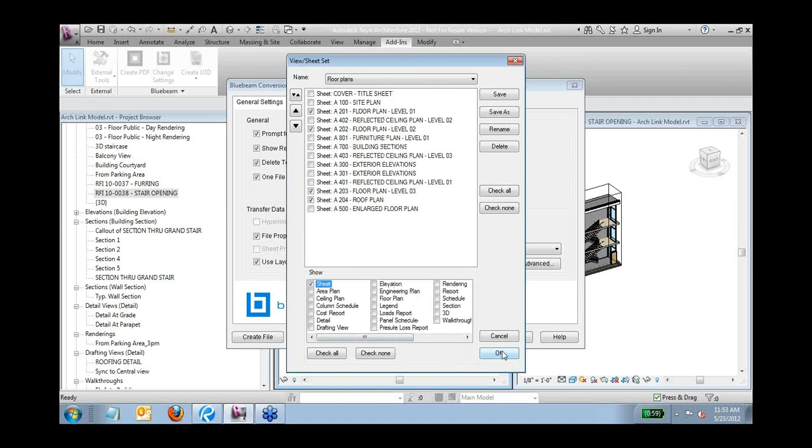As well as creating 2D PDFs, whether single PDFs or as a batch, we've also got the ability to create 3D PDFs, which I touched upon with that RFI response. If I go to a 3D view here, I've section boxed this stair tower off. I have a couple options - I can create a 3D PDF directly, I can export that U3D file like I showed in the example, or I can just copy this to the clipboard and paste it directly into Revu.

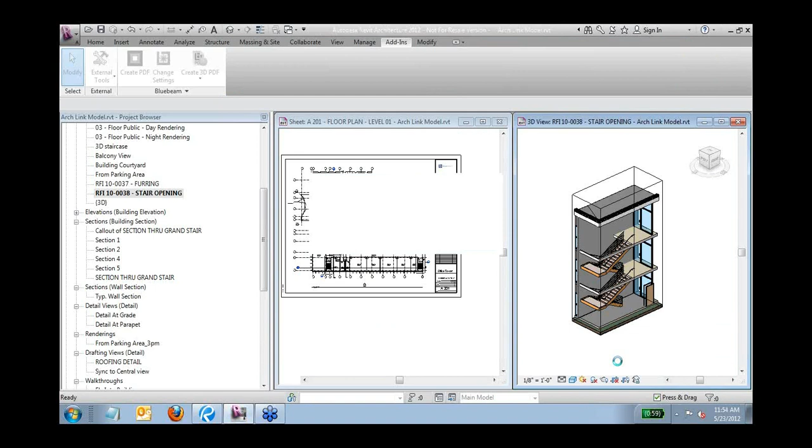So as I have a Revit file here, and I want to create that 3D PDF, I just create that and name it however I want and select OK. Revu is now going to export all those objects as U3D, then convert it to a 3D PDF for me, and open up that finished product in Revu. And voila, there it is.

So here's one from Adam, he's asking about DWF support. Yeah, so DWF is the file format that's exclusive and proprietary to Autodesk. We currently don't support DWF files, but if you can create those to PDF, then you can interact with them using the markup and editing tools in Revu.

Here's another one from Luke - he's asking what's the status of the Bluebeam iPad app? Awesome, I love that one. We released it, and we've got a lot of feedback to have Revu on the iPad because we understand mobility is super important for everyone this day and age. We released an iPad app in March, end of quarter one, and it's available for free. It's a PDF viewer today, so you can take your drawings out to the field and have that set synced up with Box or your Dropbox.com account. We are working on markup tools to actually take that technology out in the field with you on your iPad, and that's coming later this year, so stay tuned.

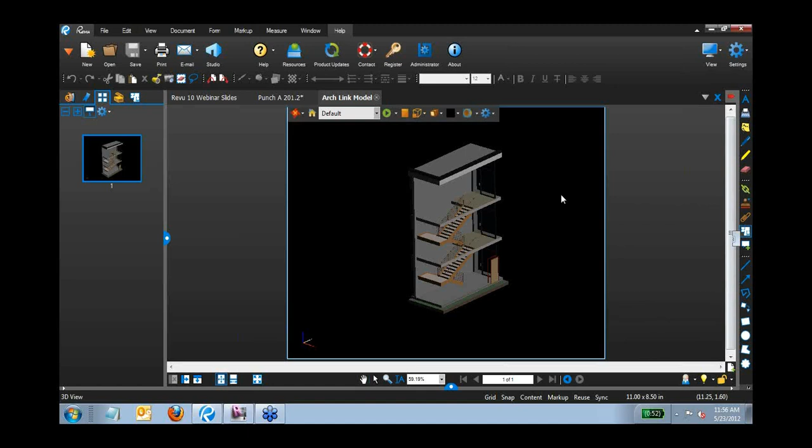Let's talk a little bit about some of our 3D capabilities. We showed you the Revit plugin, and I also want to identify that the Revit model is rich with BIM data, which we'd like to reference as we're going downstream. We've got that information available using my 3D model tree tab here on the left, as well as my properties tab on the right.

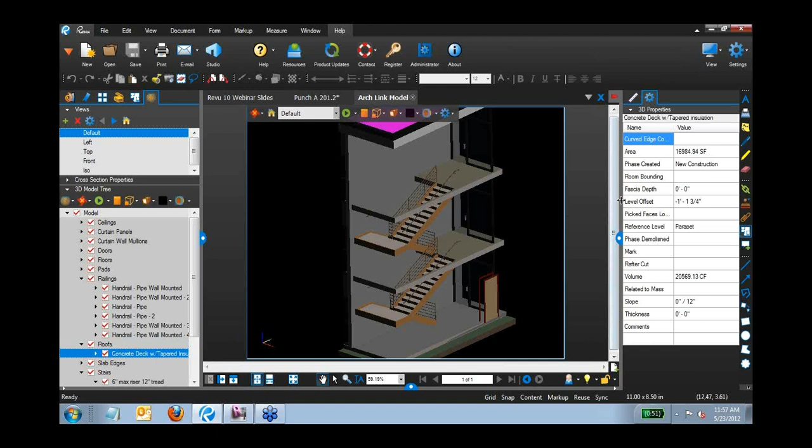As I click through each of the categories that I've exported from Revit, you'll see they're nice and neatly organized in the 3D model tree. Even if I expand these, I can see the different types of railing and some of that BIM information transferred into the PDF. As I click through each of the objects, I can even get some of the areas as well as that nice information coming from the Revit file through the 3D PDF.

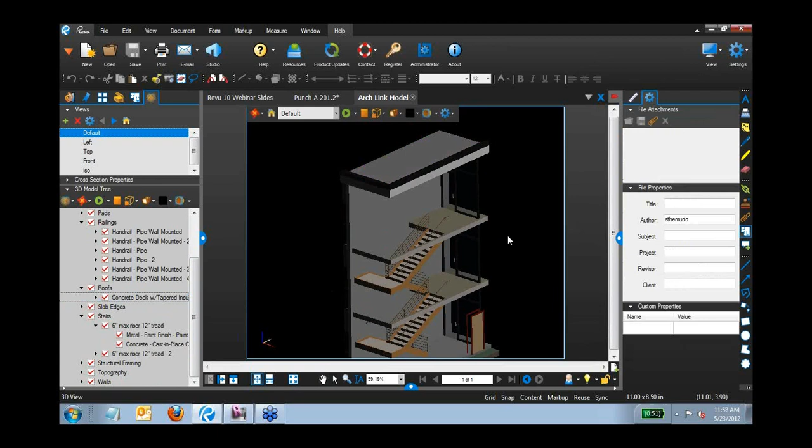These are great to really articulate and coordinate with different consultants when those 2D plans or elevations don't quite cut it. Even owners love to see progress, and I encourage you to keep your owner updated with 3D PDFs, because with the PDF being such a common file format, they're easily able to double-click on it and open it in their PDF viewer to see the 3D model, just to keep up to date with the design.

Well, that's all I've got now. I can go back to my initial contact page just to cover a quick recap. We covered the Studio project, which is like a mini document management system where you can share PDF files as well as multiple other file types, with links to hyperlink areas that you refer back to over and over.

We also talked about 3D PDFs from Revit. We support PDF creation from Navisworks Manage and Simulate, and you can then mark up those 3D PDF views using Revu. Also the ability to create new layers to update the drawing sets, spaces to help with punch item lists, adding a little bit more metadata to your markups, the tool chest enhancements, as well as the toolbar and the entire interface.